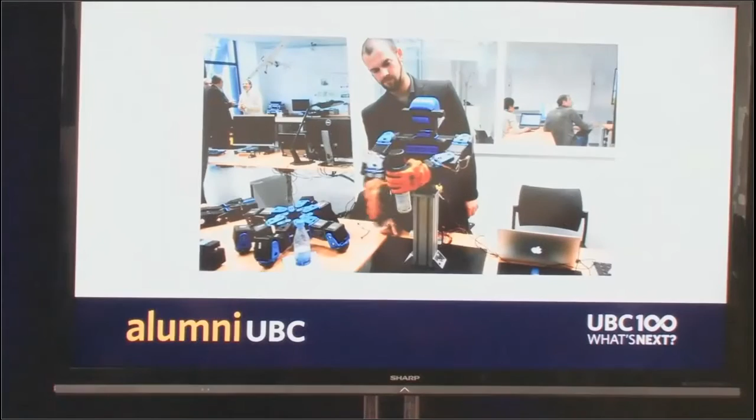So this is a first example of an open robot. You can buy the plans for all the links for this robot, download it, print it, and make your own robot. It's available just online as a web thing. If we can go to the next slide - the rest of it is a lot of Italian talking.

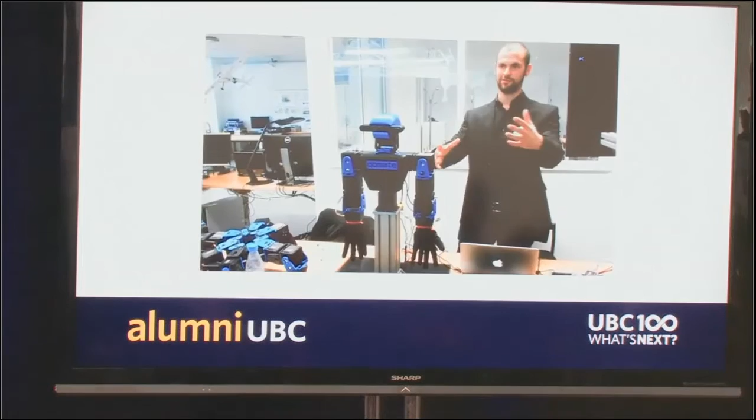Maker - this is a big part of it too. Not only is there now the ability to print your own robot. This is a 3D printer, a MakerBot. It's printing basically the head, the face of a robot. And as you can see from the graph, again, that exponential curve of the ability of desktop printers being used by people around the world.

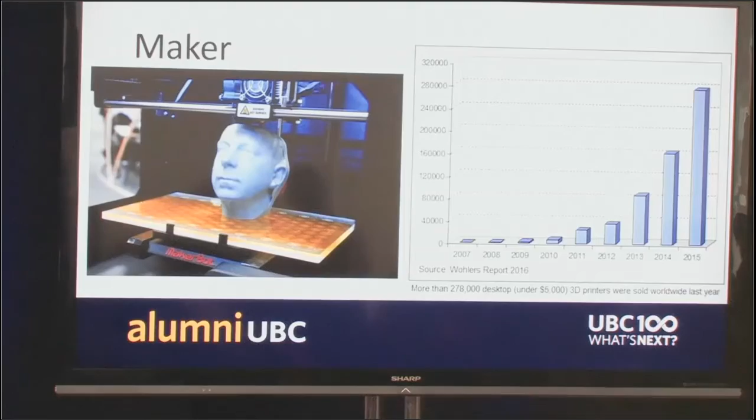So we've got so many different pieces here. We've got the computation, we've got the communication, we've got unplugged power, and we've got this open ability to make your own robot. And those are the pieces that are pushing it forward.

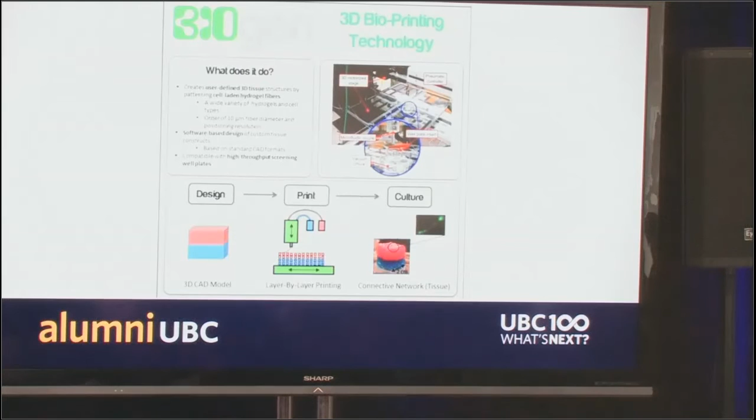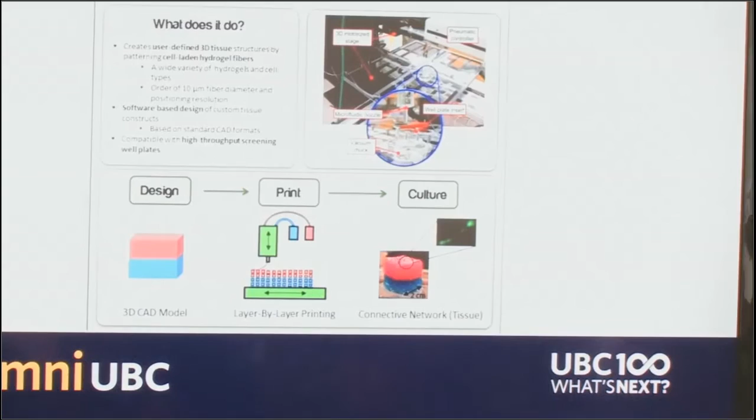In fact, we even have biomakers. This is UBC technology - this is Konrad Walus's 3D bioprinting. He's a professor in electrical engineering here at UBC who is actually able to produce and print tissue. That's incredible because now you're not only able to make the brains that can communicate, but you can create a biological piece that can connect into robotic devices. So that's pretty exciting, a little scary too.

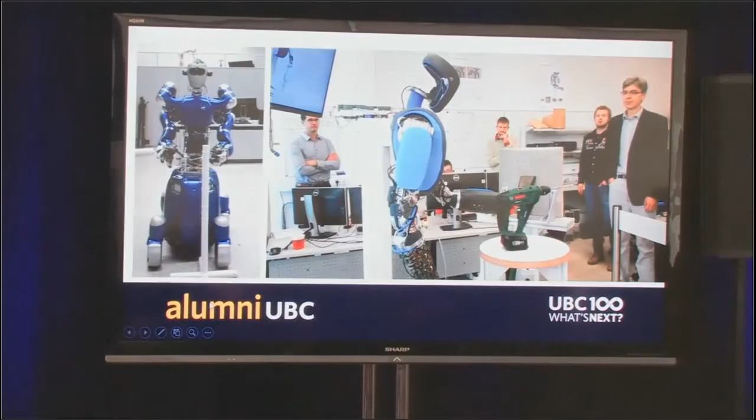So what will this mashup look like? I hope it's rosy. I want to show you a video from the German Center for Robotics that I visited earlier this year. I like to point out that the robot is using a vacuum cleaner to clean up after itself. It's able to sense, grasp the handle of the drill, and hopefully we're going to see it able to - it's found that drill. It has to do a little thinking here.

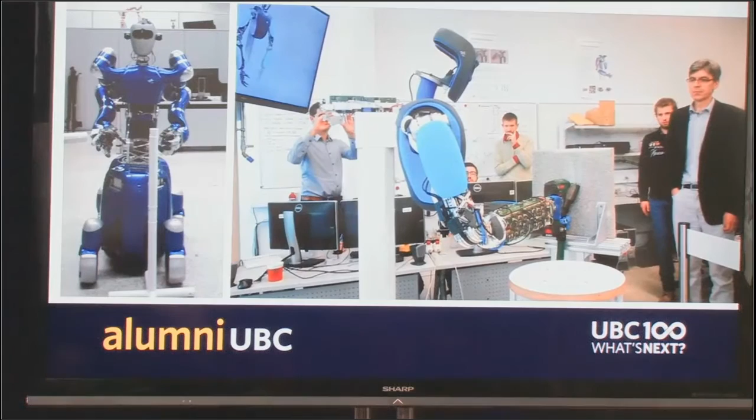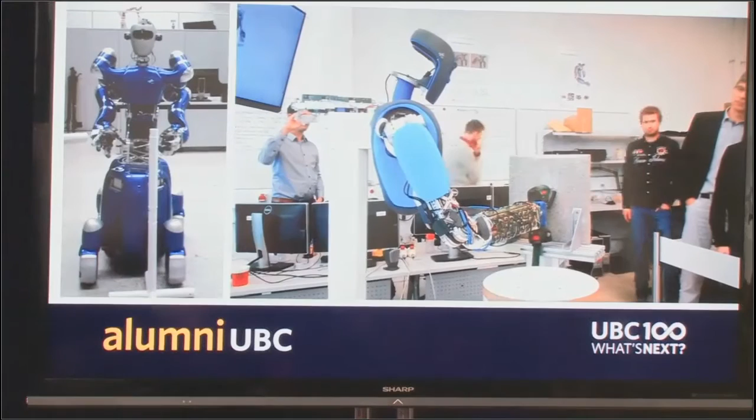And now drill a hole through a concrete block, because those are the kinds of things we like to do with robots. I'm not sure why this demo... actually I do. It's because the ability to go from no force to maximum force, and then sense when the robot has gone through the concrete and not keep pushing, is all embedded in the intelligence of this robot. We're getting close to all of those pieces, and I love that it cleaned up after itself when it was done.

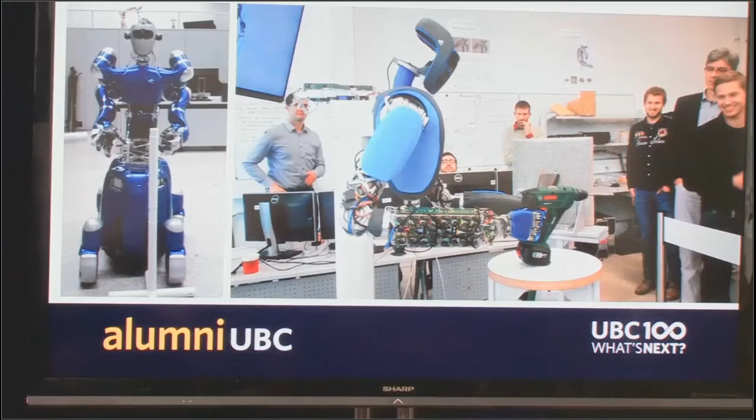Okay, if we could move on. So here we are today, and we're still with our robots. They're not very humanoid, they're actually in lonely colonies building cars for us at the GM plant. We'd like to get them together. We'd like to have people and robots working in collaboration. We'd like to get a robot hug, me and Charlie. We'd like to be able to take the end of the robot and have it help us. But we need to figure out whether we're going to have conflict or collaboration.

One of the things we're thinking about here at UBC is how we share space with robots. When we get together and we're both reaching for something — if I'm reaching, ooh, how did that happen? If I'm reaching for a salt shaker, a knife, and you're reaching for something, how do we resolve that conflict? So Ajung, one of our PhD students, figured out that when we both reach for something, we use a cue called hesitation. We use that to communicate that I recognize you are there, and I want to mediate a solution with you. So we use human cues to collaborate.

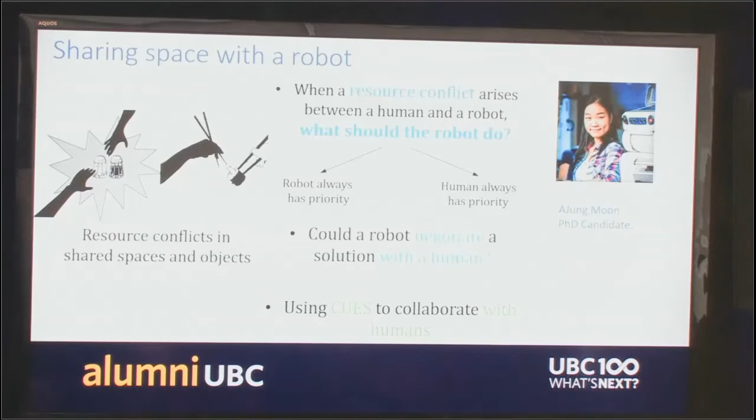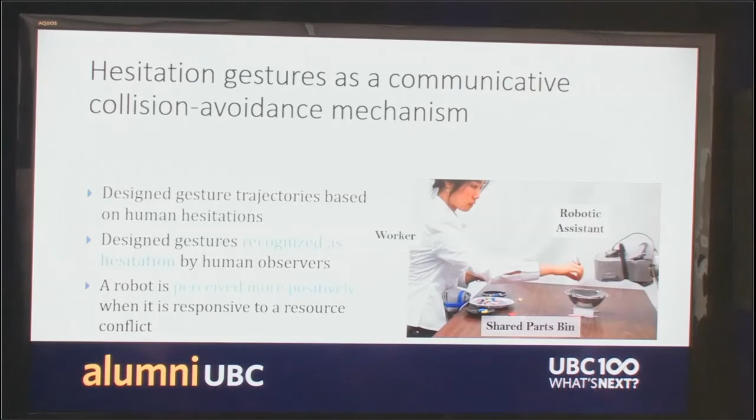What we're thinking about is how we can use those cues to collaborate with robots. So what we developed in the lab with Ajung is designing gesture trajectories that mimic human hesitation, that allow the robot to show it recognizes you're there, and the user perceives that hesitation. So we have the worker, the robot assistant, and a shared part bin that they're both going after. So if we can fire that video.

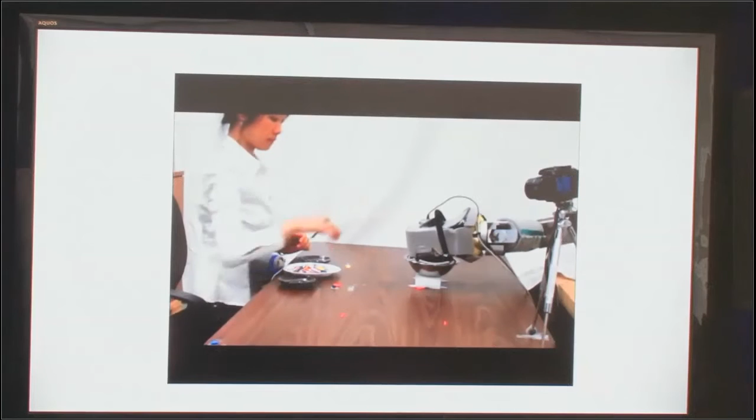So we show three examples. This is traditional robotics without collision avoidance. Oh, can we go back? There we go, thanks. So here's the traditional, blind condition — the robot doesn't know you're there. And this is what it looks like. Not so good. Okay, then if we go to our next condition, I'll give it a minute here. Oh, get your hand out of the way, Adrian. That's not good.

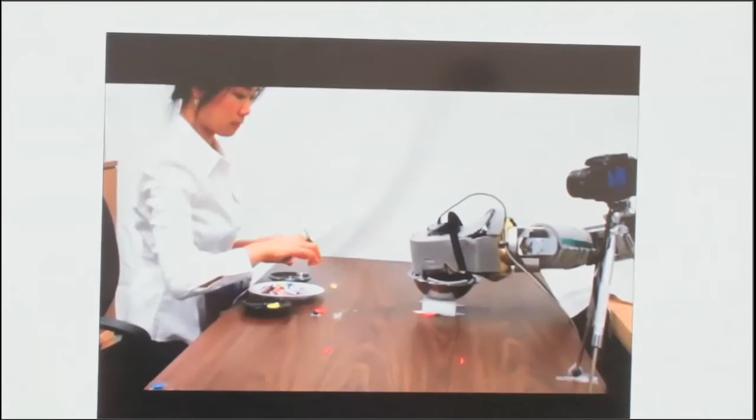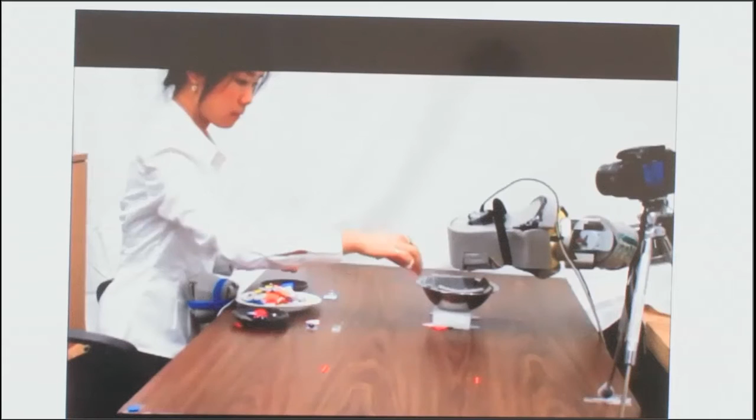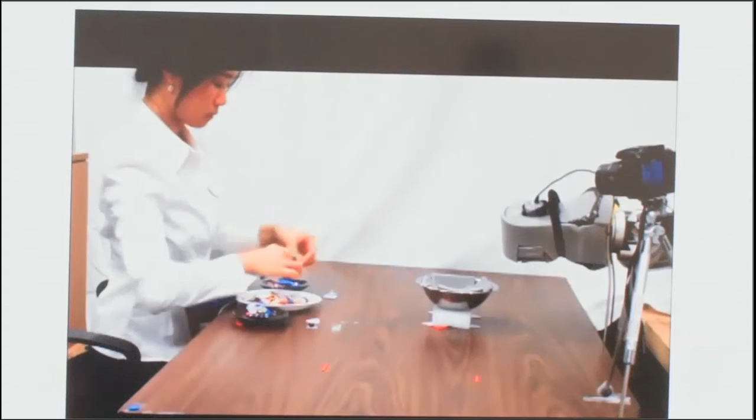This is traditional collision avoidance. The robot recognizes that the person's there, but then it stops. So the user isn't quite sure what's going on in that collision avoidance scenario. People liked it when we tested with users, but they were very confused.

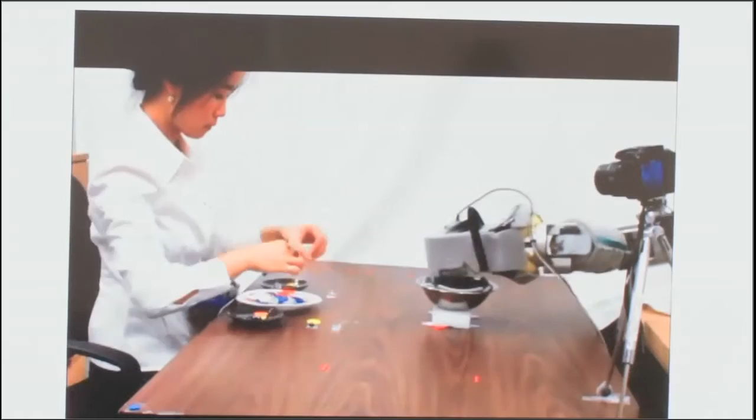Then we implemented this hesitation gesture, this little cue that says I recognize you're there. So when the robot sees that the worker's in the way, it does a little bob that users interpreted — they looked at it and said, oh, the robot knows I'm there and it's giving way to me. What a nice robot, this is the kind of robot I'd like to work with. They thought it was shy, they thought it was kind of cute. So it's interesting that just these little hesitation gestures added a bit of humanity to the robot.

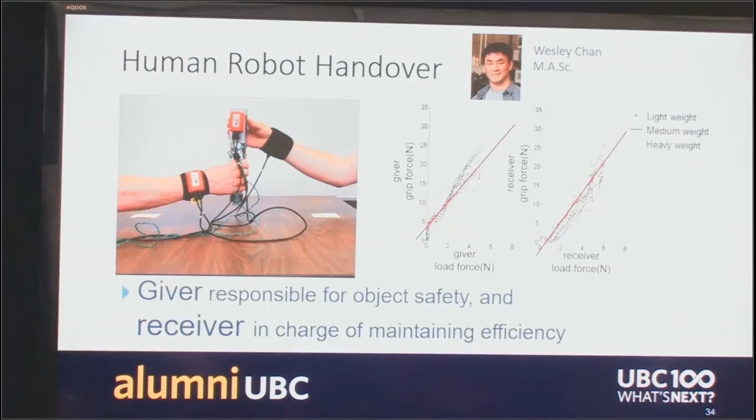The other thing we're going to have to do with robots is share. Robots can be very, very grabby — they tend to hang onto things really, really hard. What we worked on is human-robot handover, teaching robots how to pass objects nicely. This is work done by one of our students, Wesley Chan.

If we can slide back for a minute — what this work was, we made this little tool here, it's actually a handover baton, and it measures forces and positions of where that device is. It was created in the lab, and we brought people in and got them to hand it over hundreds and hundreds of times, back and forth. What we discovered is there are rules for handover, and we better teach them to robots.

Those rules are that the giver is responsible for the safety of the object, and the receiver is responsible for how fast the handover takes. That's natural, and somehow we've already figured that out — we hand stuff over and most of the time we don't drop it. So what we did is teach the robot those rules by designing a controller for the robot to give things and be responsible for safety.

So in this video, here we go. Oh, can you go back? There we go, and start.

I can do robots, I just have technical difficulties. There we go. Excellent. Okay.

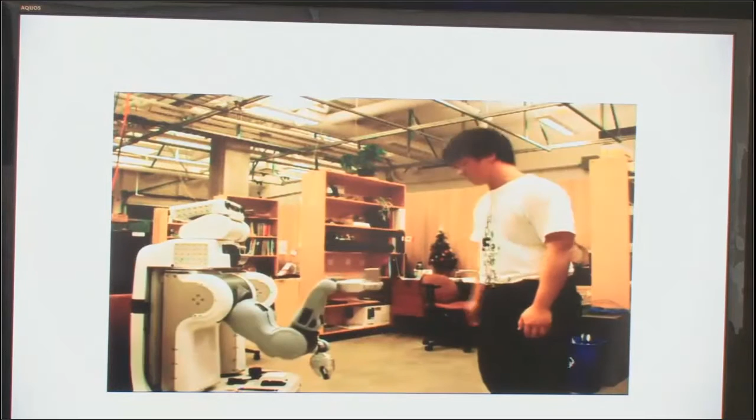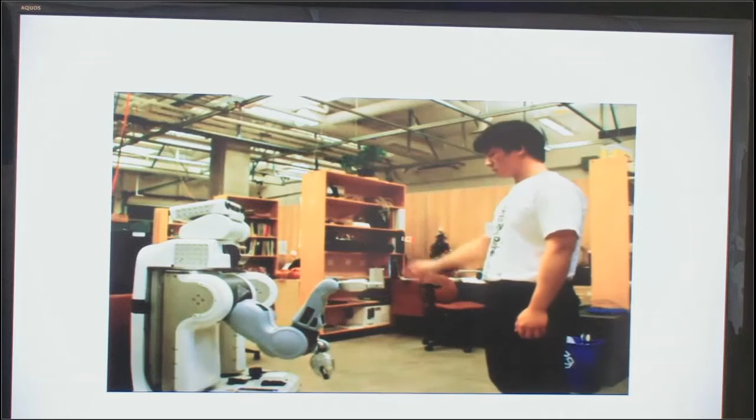So this is Wes, and this is Charlie, and this is the traditional handover with Charlie. He's very grabby, and when you push him around, he drops things. Not good. So the controller that Wes developed basically allows the robot to recognize when things are being taken from it, and only let go when things are being taken, not when the arm is being displaced. So it measures the grip force and the load force, and it only lets go when Wesley is taking things away from him. The real value here is when you're handing over a hot cup of coffee and there isn't a tug of war.

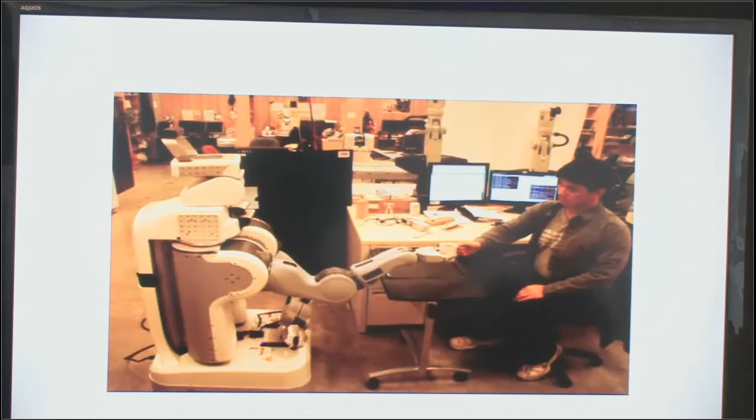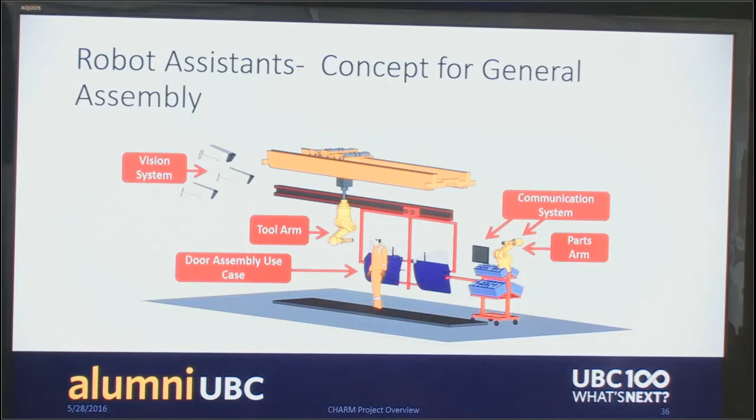Okay, so what else do we need? Well, imagine that we're going to have a robot working in a factory with us. So we have a robot that's going to be able to fetch things, hand things over. What's that going to look like? So we took some of these ideas of sharing, space understanding, collision avoidance, and we put them together in a car door assembly operation.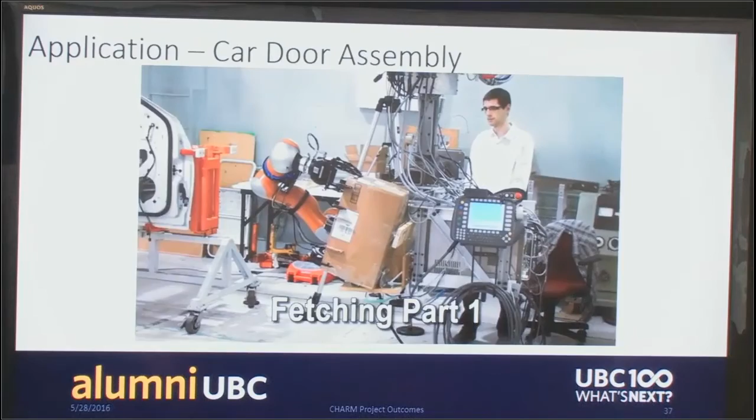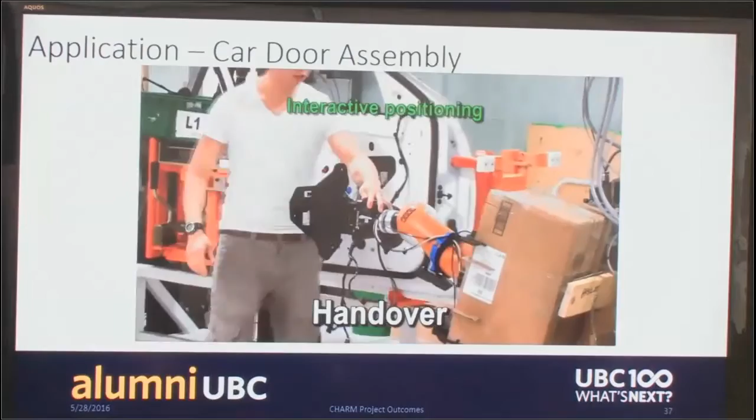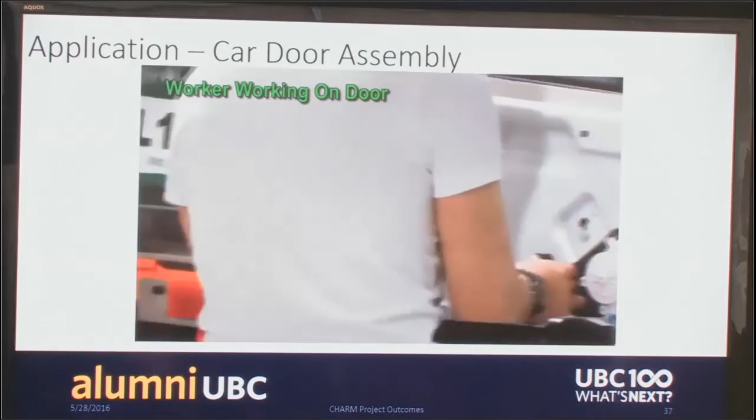So this is one of our students, Matt Pan. He's currently doing an internship at Disney, so we miss him a lot. But here he is working with a car door, and we've got a robot that's got the handover algorithm, collision avoidance, position recognition, and it's fetching parts in our high-tech part slot there that we made out of a cardboard box. And it's bringing this part over to Matt while recognizing that Matt is working. So it stops until Matt comes over, recognizes that it's being repositioned, and then when Matt gets the part into the right place, it just lets go nicely, and there's no tug of war, and then it recognizes again when Matt's gone back to do something and realizes it needs to go back and get another part.

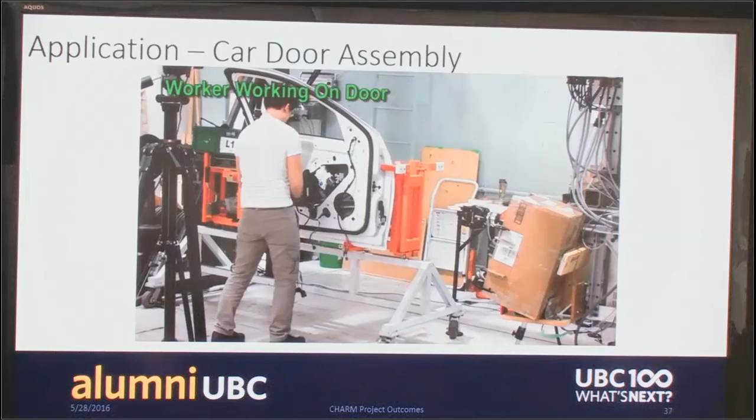So this is the first step of what we think is going to be the assistant of the future, something that's paying attention to you, hopefully helpful, shares space, hands over things nicely, and is, after all, kind of cool in an orange kind of way.

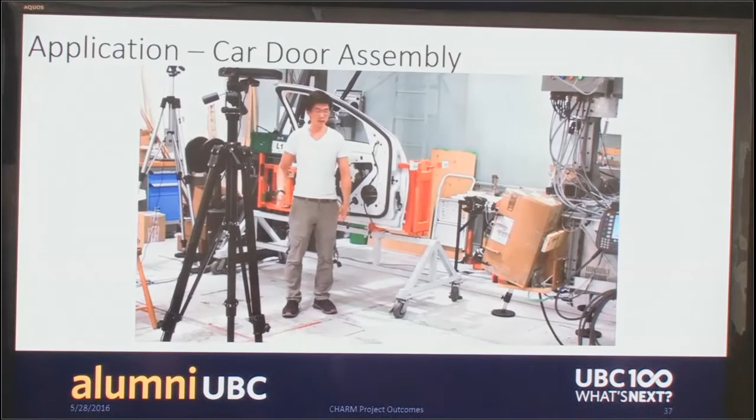All right, so let's move over from there, because Matt tends to talk a lot, and let's talk about the future, those rules of engagement.

So Asimov's rules actually had a zeroth rule added to it, which is don't harm humanity, or through inaction, allow humanity to come to harm. And then the 1, 2, 3: don't harm people, obey orders, and then protect its own existence. And in that order, for those very good reasons of having things turn out well. How do we think about those rules? And does everybody agree on those rules?

Well, through a project that we call ORI, or the Open Roboethics Initiative, we've gathered people from law, from ethics, people from universities across the world to think about these problems. And what we do is we create questions that we want to ask the general public so that we can, in an open way, source what people think about important questions about how engineers should design robots and what should be those rules which form the base of the algorithms that our robots will use.

So one of the most recent surveys we did was on the ethics and governance of lethal autonomous weapon systems. So these are robots that can potentially violate Asimov's law. And how do people think about this kind of activity, and what should roboethicists and roboticists do in terms of programming robots?

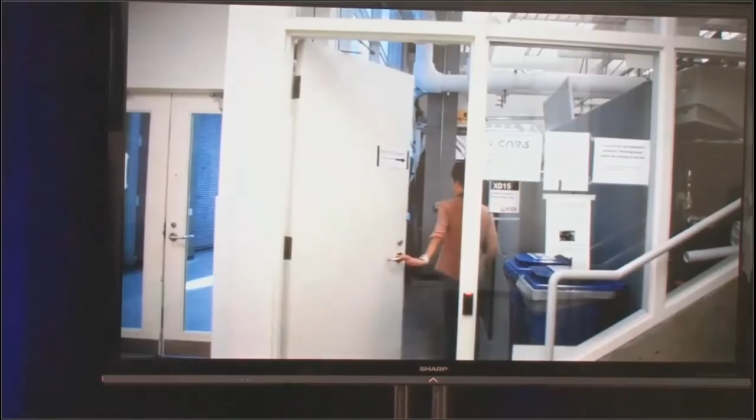So welcome to my lab. Can we turn the volume up? There's Charlie and AJung.

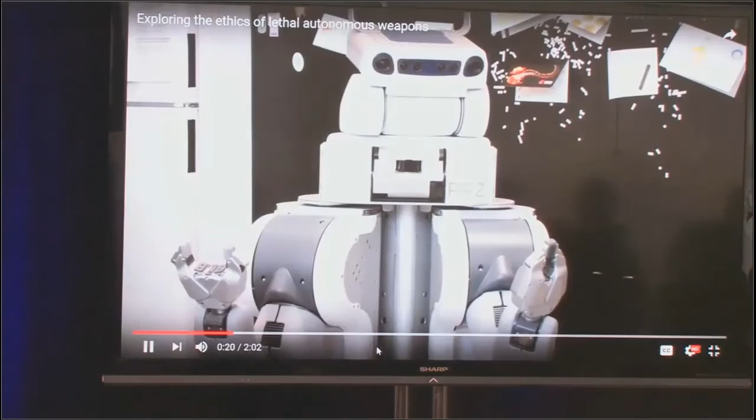Oh, sorry, okay. To our homes and workplaces to interact with us. And we wanted to look at the public sentiment when it comes to the issue of lethal autonomous weapon systems.

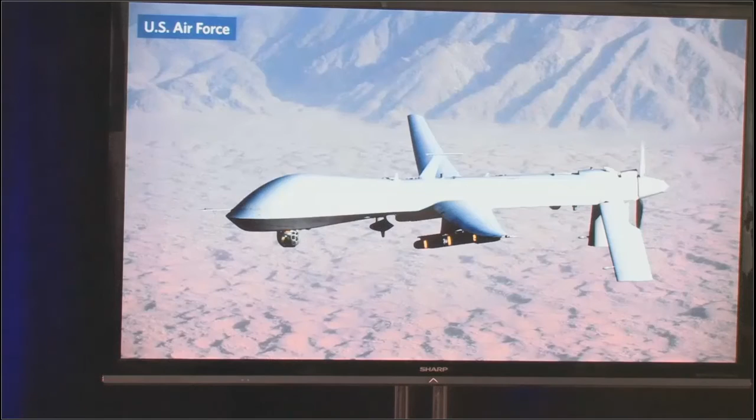Today, we're very familiar with the idea of drones being used for war, which are what we call remotely operated weapon systems. You have these flying robots that essentially act as eyes for the pilots who are in a different location, controlling the robots and making that lethal fire decision. Now imagine taking that human out of the loop so that there's no human behind the cameras, but it's the robot or the autonomous weapon system that is surveying the area and picking out what is a legitimate target and making that fire decision on its own.

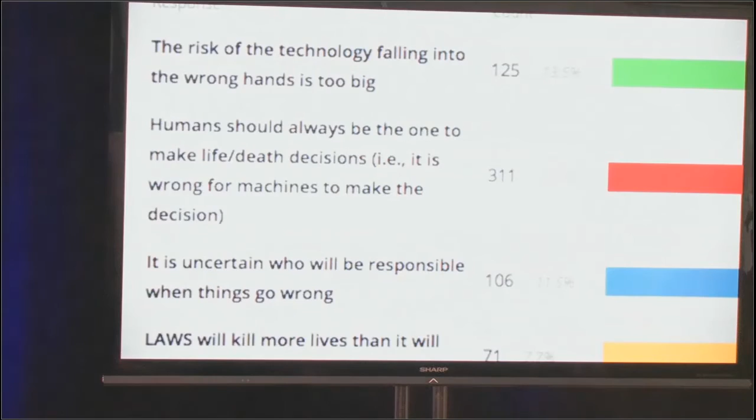That particular system is what we call lethal autonomous weapon systems. When it comes to reasoning about lethal autonomous weapon systems compared to remotely operated weapon systems, people tend to have a very shared principle perspective that machines should not be making life or death decisions in place of humans. The fact that this was shared across different cultures or different countries was very interesting, because that means there is something we need to be really concerned about in terms of the moral challenge we're facing in developing, implementing, or deploying this particular technology.

So it's important, I think, as engineers, as researchers, that we pay attention to this and ask these questions now, because as we see, the technology is coming, and it's important that we think about how we want to have that play out.

But I do hope that in the end, it's going to be rosy, not Terminator. So, not to end on a sad note, but on an important note, what we need to think about for the next 100 years, about the future of robotics.